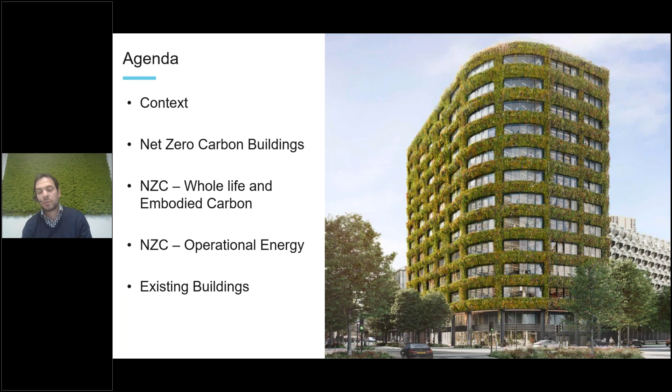So just to give a bit of context, why are we talking about net zero carbon? A couple of years ago in Glasgow, the world came together at COP26 to review our global commitments and targets, and even with the most optimistic scenarios, we're still significantly above the 1.5 degree target we've set ourselves in terms of limiting climate change, with actual policies indicating we're probably closer to 2.7 degrees of change. So although we continuously talk about reductions and meeting the aspirations of the Paris Agreement, we are still a long way away from achieving it.

There are a number of websites and organizations which track individual countries' performance, and as you can see from the globe shown on screen, most countries are either critically insufficient or highly insufficient in terms of their policies. There are very few countries aligned to the Paris Agreement, I think it's 2 at the moment, and there's a number which are almost sufficient but still have a long way to go to meet those targets.

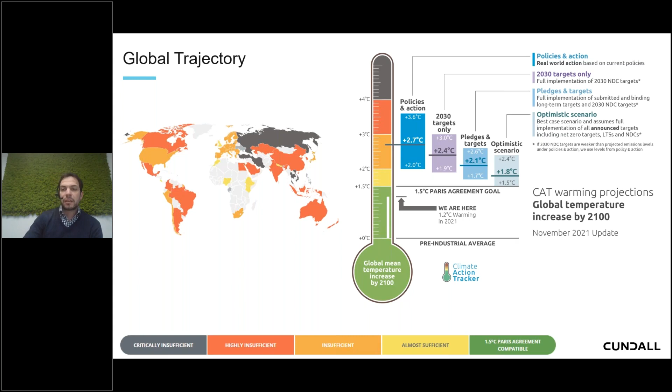When we look at the UK, it's an interesting scenario - we generally are doing better than most in terms of policy and where we actually sit. The UK were one of the first governments in the world to declare a climate emergency and set a net zero carbon target by 2050. We did this back in 2019, and we've since strengthened that because we know that being net zero carbon by 2050 won't be enough.

It's the scale and speed of reduction which is important. We've set interim targets of 78% by 2035 and 68% by 2030, and that's really important if we want to align to the 1.5 degree Paris Agreement. That still leaves the UK insufficient and not aligned to the Paris Agreement, and this is purely based on policies, not action. The policies we've got will potentially enable us to get there, but it's still not fully aligned, and we need the action to follow up the policy.

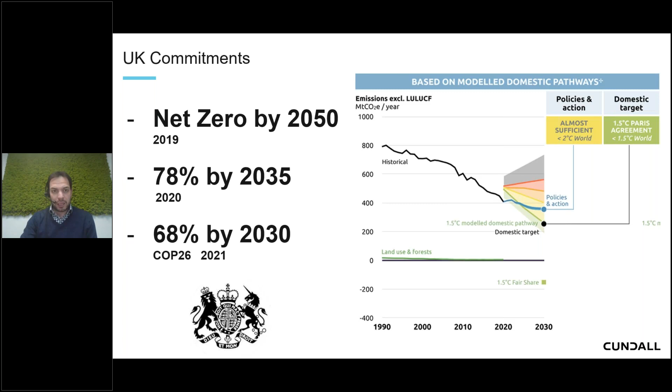What's really important is to look at it by sector. Last year, the Committee for Climate Change issued a document to the government which indicated where they were on track and where they weren't on track in terms of meeting their requirements. In terms of energy, electricity supplies and surface transport, there's credible plans, some risk associated with that, but they generally have a strategy of getting close to where they need to get to, not fully, but close. Whereas the ones we're generally interested in, buildings and construction, there's almost no strategy. There's significant risk and insufficient plans in order to get there. So there's limited action and limited policy in the area of the built environment, which we need to really address.

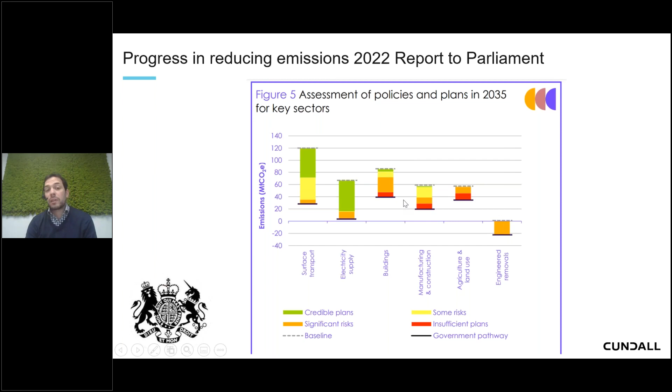So what are we seeing in terms of how that is being addressed at the moment? There's been obviously a significant move over the last couple of years towards net zero carbon. Everyone's kind of talking about it. Most projects will have a net zero carbon agenda. And that's mostly not being driven by government, it's generally being driven by the private market. We're seeing demand from occupiers who are setting their own science-based targets and setting aspirations to be net zero carbon and demanding that of the buildings they're occupying. We're seeing most of the UK developers sign up to the World Green Building Council or the Better Buildings Partnership commitments to net zero carbon and are working through their pathways and trajectories. And that's being passed on to design teams for both new and existing projects.

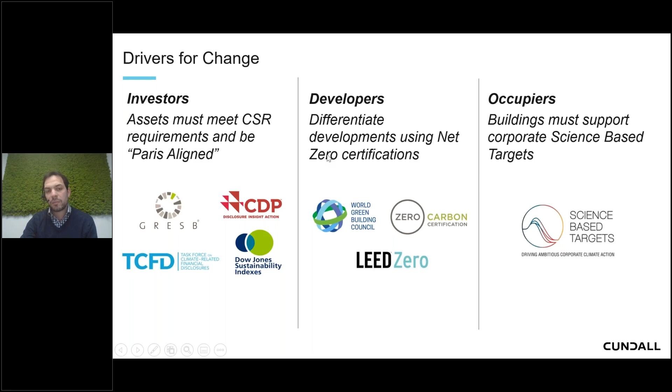But the biggest driver we've seen over the last two years has definitely been from the investment community. Lots of funds and large portfolio asset managers are reporting to TCFD, the Task Force for Climate-Related Disclosure, reporting to GRESB, reporting their climate emissions, and are marketing their funds as green funds, passing those requirements down to developers who are then passing them down to their design teams. So there's a huge drive at the moment from the investment community in terms of compliance with net zero carbon.

One of the ways that they are doing that is via CRREM, which is basically a decarbonisation pathway for existing real estate. What this basically does is it looks at the carbon emissions or energy intensity of any building in the world. So you can select an office building in Berlin, a factory in Mexico, and it will give you an energy target from now to 2050, on a sliding scale aligning to a 1.5 degree trajectory. What large portfolio owners are doing is looking at their individual assets, understanding the current performance. If it's below the green line, that's good, it's performing well. But if this asset, which is below the green line now, doesn't do any works and continues operating at the same level for the next 10 years, then it will cross over that green line and be above its fair share according to the Paris Agreement.

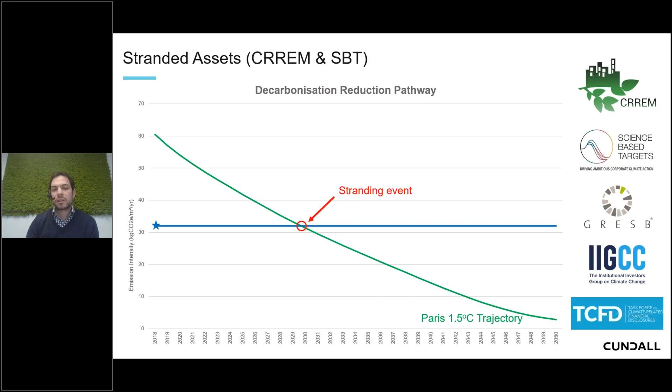That is known as a stranding event, and what lots of pension funds and investors are doing is trying to understand when their assets will strand, and either move those assets on if they're going to strand immediately, or do works to those assets in order to improve them. So there's lots of net zero carbon assets and audits in order to move those assets more aligned to the Paris Agreement 1.5 degree targets. So that is driving a huge element of the built environment in terms of why we're doing net zero carbon.

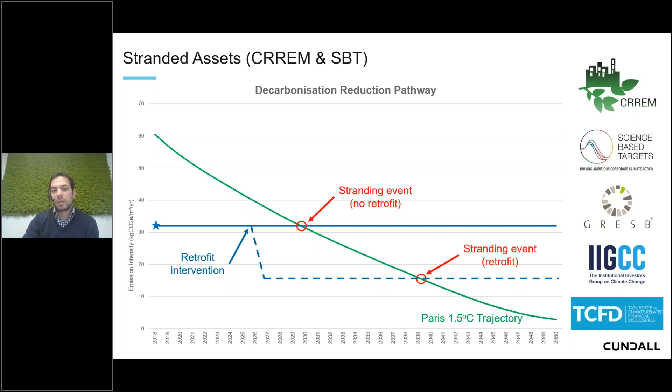In terms of definition, there's been a lot of documentation published over the last few years from UK GBC, LETI, CIBSE, and other organisations, and we're generally getting to a unified definition. The Whole Life Carbon Network last year published a unified definition for net zero carbon, which has been endorsed now by iStructE, CIBSE, RICS, RIBA, and pretty much all of the built environment. So there are unified definitions now, which we're going to be taking forward, and they've been written into the new RICS guidance and will be used for the net zero carbon verification standards. And what's important to understand is really the difference between net zero carbon and carbon neutral.

Carbon neutral has been a term we've banded around for over a decade, probably 2 decades. And that simply is that you work out your carbon emissions and then you have removals which equal your emissions, so you can buy offsets which equal your emissions. There's normally a requirement to have a reduction plan, but there's no minimum standard you must meet in the first place. As long as you remove your emissions, you can claim to be carbon neutral. That's kind of lost a lot of credibility over the last few years with the unreliability of offsets and the idea of paying someone else to do your work, basically.

So where we've kind of moved towards is net zero carbon. Net zero carbon basically means that before you go to removals, you have to hit minimum performance targets which align to a 1.5 degree scenario. So your emissions have to be capped in alignment with 1.5 degrees, and then you can choose to go to net by doing removals. But in theory, just doing the emissions reduction in alignment with 1.5 degrees is enough to align with the Paris Agreement. The removals are a final added extra step.

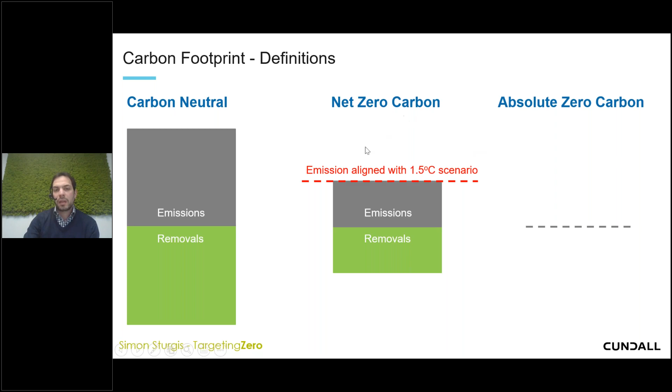When we talk about net zero carbon in the built environment, we're generally breaking that into 2 different elements. We're talking about net zero carbon in operation, so that's generally operational energy, also including refrigerants and off-gassing, which is becoming more and more important as we reduce energy consumption.

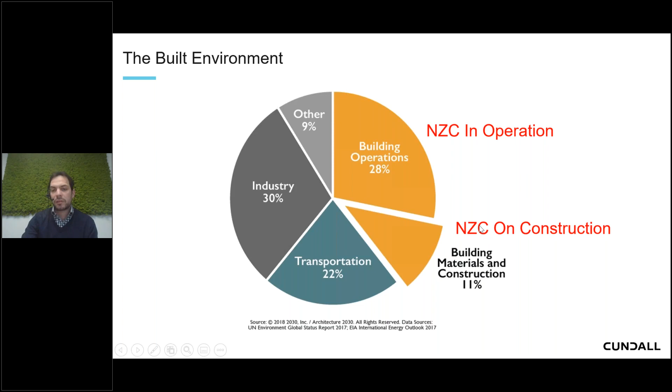There's also net zero carbon on construction, which looks at the embodied carbon in materials. That's been more of a focus of structures, architecture and facades, but the importance of building services can't be underestimated. What we've found over the last few years is building services have generally been underestimated in terms of their amount of embodied carbon, and you have to remember that building services are generally replaced much more regularly than things like facades or structures, which generally have at least a 60-year lifespan, whereas services is generally 20-25 years, so we'll have a much more regular replacement cycle.

Just starting with embodied carbon, over the last 10 years we've seen a much bigger focus on it, starting with the introduction of the life cycle modules from the European Union. The RICS professional standard was published in 2017, which was a major game changer, so the construction industry had a unified way of calculating. That's just being updated at the moment and will be released later this year. Again, LETI have produced a number of guidance documents, including their embodied carbon primer.

CIBSE in 2021 published TM65, which is the first methodology in the world for calculating embodied carbon in building services, and hopefully a number of you have been working towards that and are using that on projects. The next step will be to get embodied carbon into building regulations, like Part L regulates energy efficiency. Part Z is a proposed guide which will make it a mandatory requirement for all developments to do embodied carbon calculations. There's a strong lobbying group trying to get that through Parliament at the moment.

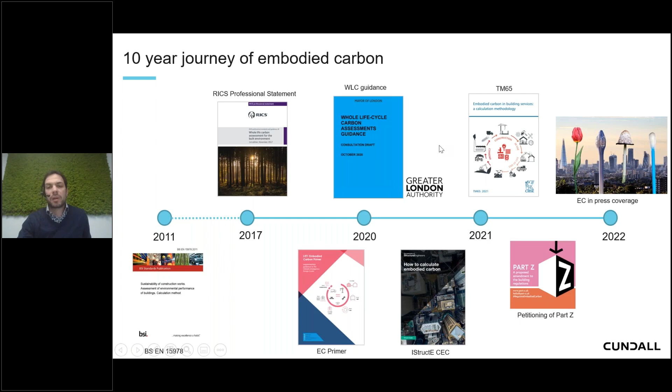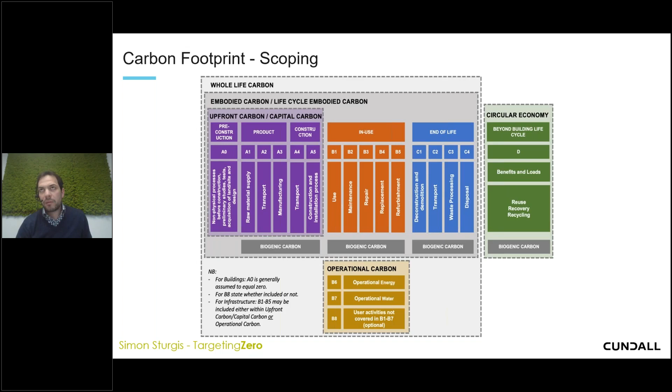So when we look at embodied carbon, we generally use the RICS methodology, which breaks embodied carbon into a number of areas. To simplify this, we generally talk about upfront embodied carbon, which is the carbon that the building requires to be built up to practical completion. And then we talk about whole life carbon, which considers the in-use, repair, maintenance, refurbishment, eventual demolition, and then hopefully reuse of some materials as part of the circular economy.

Whenever doing any assessment, the main focus is setting targets around the upfront embodied carbon, because that can be much more accurately calculated, and the climate emergency is now, so we need to understand what that embodied carbon is and limit that as much as possible, whilst making consideration of why we're doing things based on whole life carbon.

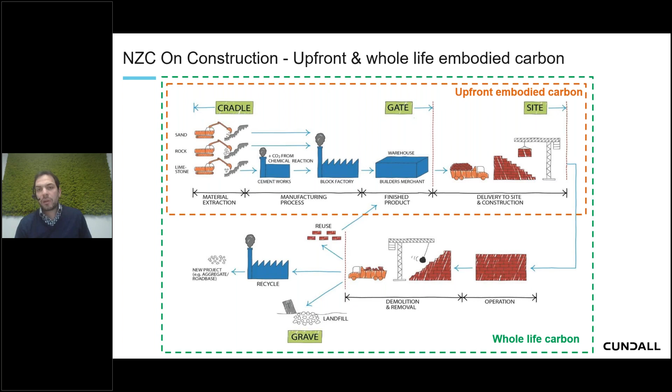A good example is facades. If you're looking at a building, if it has a facade system which is low embodied carbon but has to be replaced after 30 years, it might be more beneficial to go for a slightly more intensive upfront embodied carbon, but it's got a 60-year life. So again, it's making those trade-offs between upfront embodied carbon and whole life embodied carbon.

A number of organisations, especially LETI, have been setting targets around embodied carbon, both upfront and whole life, for a variety of buildings including offices, residential, education, and retail. These are for the whole building, but the documentation breaks them down into sub-targets. So for a commercial office with a target of 600, there should be a target of probably 300 for the structure, 100 for the facade, and 100 for services. It's about understanding the budget for your element of works and then trying to lower that as much as possible.

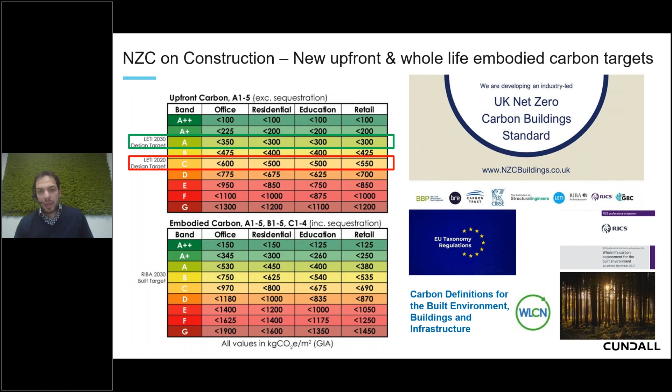In terms of building services, we should be using the new CIBSE TM65 methodology to fairly accurately predict embodied carbon. More manufacturers are publicizing their embodied carbon data. Ideally that would be EPD certified data, but a lot of them are only just starting to go through the process. The problem we generally have in building services is very complex supply chains.

If you think about structures, you've generally got a steel beam which has been mined and fabricated in one factory - a very simple process. Whereas with something like an AHU, you might have 1,000 components coming from all over the world, and depending where those components are manufactured, there will be different carbon emissions. Their transportation to be assembled will have different emissions too. Pulling all of that information together is quite onerous for the supply chain.

Manufacturers are doing that, and if you can specify performance requirements for different equipment, that's really useful. Getting them to upload their data onto CIBSE's website is really valuable, because then we have a much better database that all consultants can use to benchmark projects and use default values.

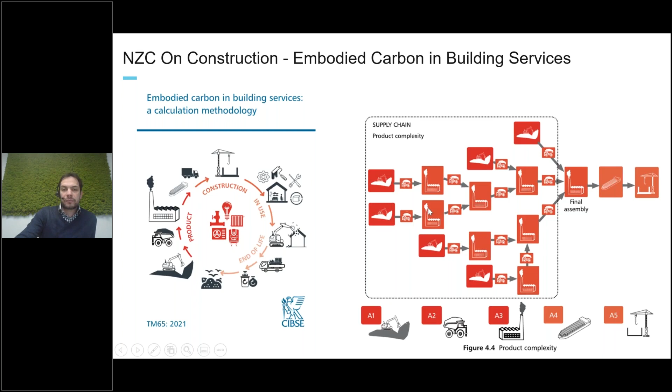We're seeing more and more of a requirement in terms of planning for embodied carbon. Whenever looking at a new project, there will be a requirement as part of the planning application to do embodied carbon assessments, looking at different structural solutions, different facade solutions, hybrid structures with CLT flooring and steel members, full steel structures, or full timber, comparing them against benchmarks like the GLA benchmark as part of the planning application.

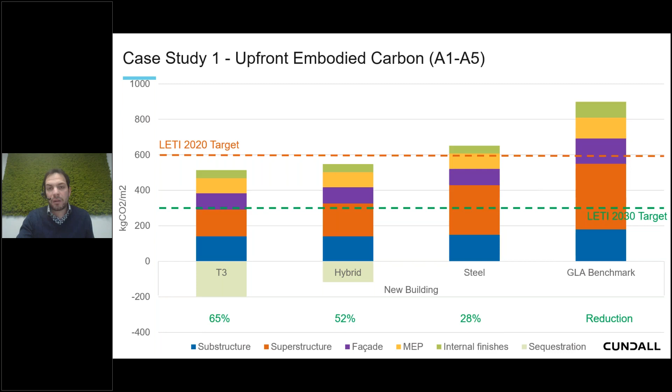What's interesting is we're starting to see a requirement to not only look at the embodied carbon but also bring in the operational carbon - the operation energy. As you can see from this graph, if we take a 60-year life of a building using current grid emissions factors, operation energy is the significant part - at least half the carbon of a new building.

But if we use the national grid decarbonisation strategies, then operation energy becomes less and less important - in some instances it could be less than 5 to 10% of the emissions of a building over its life. So that upfront carbon is really important. What you should be doing is reporting both grid decarbonised numbers and non-decarbonised numbers to show the uncertainty and risk associated with some of those decisions when going through the planning process, so they can understand the implications of either doing nothing like refurbishment or a full new building.

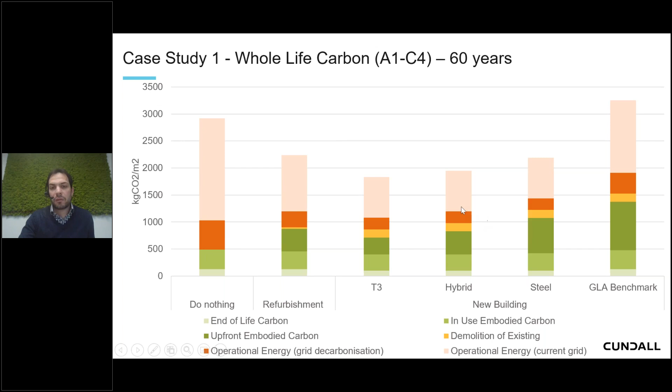One of the things rising in importance is the RetroFirst campaign from the Architects Journal. You've probably seen in the media there's been a bit of backlash against demolition and rebuild. So justifying any works is really important in planning, and we should have a focus on reusing as much as possible, whether that's the entire building or just saving the structure. Structure is generally 50% of the upfront emissions of a new building.

So if we can take a building back to structure and reclad with an energy efficient facade, you're going to be halving the carbon associated with it, whilst being able to get down to the energy performance requirements we need for new buildings.

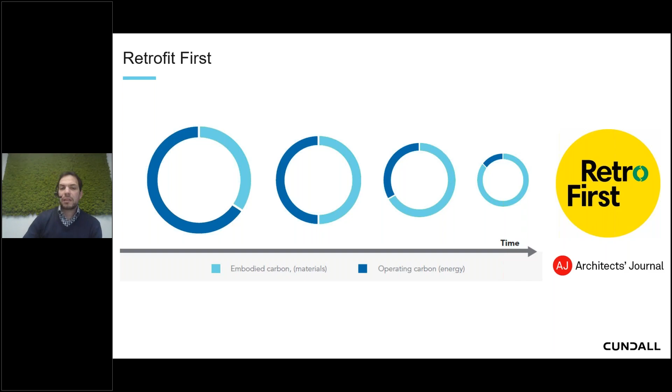Moving on to operational energy - this is generally where we've focused as building services for the last couple of decades. This is the definition generated by the Whole Life Carbon Network for a net zero carbon operational energy asset: where no fossil fuels are used for heating and hot water, where it meets local energy targets, and all energy is generated on or off-site from renewables which demonstrate additionality.

So really what we're looking to do is move away from natural gas heating or fossil fuel heating, electrify, and then reduce that energy consumption in line with targets. Once that's done in use, it's about providing renewables.

So if you're building a 2-story building out in a country park, there's no reason why you probably can't generate enough energy to be self-sufficient. Whereas if you're building a 10-story building in an urban environment, you won't have the roof space available to do that. So a proportion should be generated on site, the rest coming from power purchase and renewable tariffs, depending which country you're in and how that's managed.

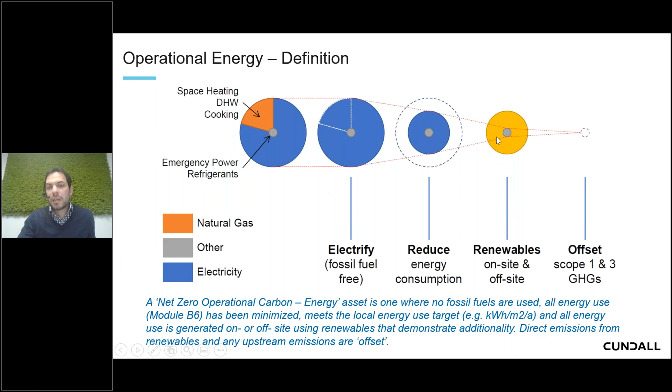We also will always have some residual emissions associated with backup diesel generators, refrigerant leakage, so they need to be reported and understood. And as we decarbonise the grid, refrigerants are likely to become a much more significant element of what we're doing going forward.

One of the biggest challenges will always be, what are the operational energy targets we're setting? The UK Green Building Council did an exercise a few years ago where they looked at how much renewable energy we can generate in the UK, bringing online the proposed schemes, a lot of offshore wind, and then saying how much would we be able to meet of the UK supply. And we wouldn't be able to meet all of the UK supply.

So at the same time as generating more renewable energy, we need to reduce demand on the grid. That needs to come across all sectors. And if all sectors reduce their energy consumption equally, that would probably equate to about a 60% reduction in energy demand in order to be 100% net zero carbon from our energy supplies, which is where the national grid are aiming to go. So that decarb strategy we were talking about earlier is dependent on the ability for the national grid to decarb, which is dependent on energy efficiency and a reduction in demand on the grid.

So if we just take a 60% reduction for all buildings across the board, we can start generating what we call Paris-proof targets for different building sectors. This is what the UK Green Building Council and LETI have done.

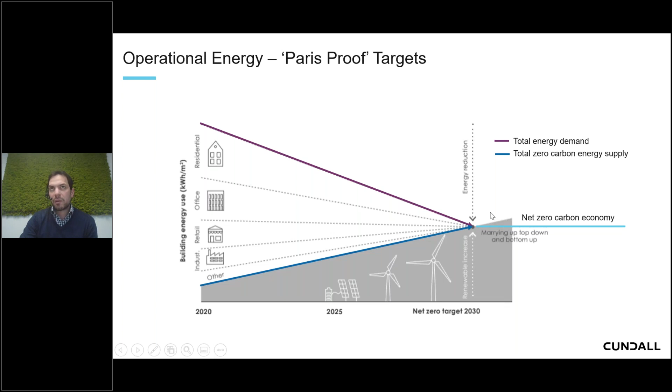If we take commercial offices, you can see here, based on the energy efficient REEB benchmarks, you've got a 50 percentile office here, which has energy consumption about 300 kilowatt hours per meter squared. Top 25 percentile, just under 200, whereas the LETI UK GBC target is down at kind of 70. So it's a significant reduction. It's not about small step changes. It needs to be wholesale change to the way we design and operate buildings.

So we know what the targets are. The question is really, how do we meet those targets and how do we measure those targets? One of the ways we've always assessed energy consumption in the built environment has been EPCs.

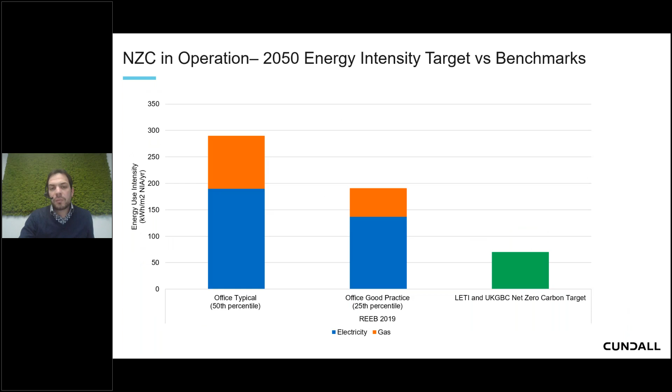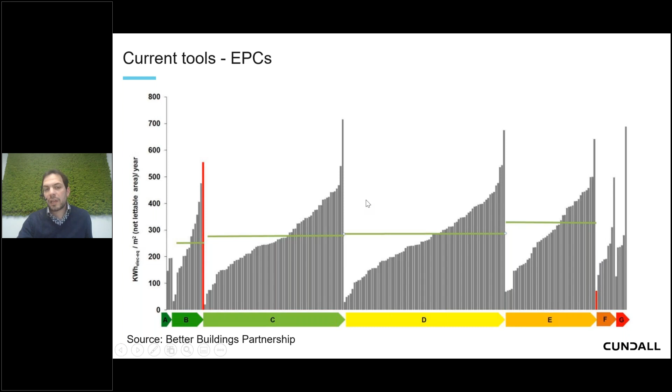We know that EPCs aren't fit for purpose. You can see from this diagram, which has been used extensively over the last couple of years, there's no correlation between the actual energy performance of a building and its EPC rating. This is because EPCs are very simplistic. They're very much focused on energy efficiency. They don't look at energy consumption. They're generally standardized profiles and only look at regulated loads, not a whole building load, looking at process loads and systems as well. So again, EPC is not a measure of operational energy. It's a good guide of energy efficiency, but that is all it should be used for.

What's been brought up to bridge the gap is the UK Green Building Council for offices have put together a step trajectory showing whole building and base building energy consumption targets. So base building would be the landlord systems. The whole building would also include small power and tenant systems being used. This approach is being used across multiple sectors, but the only targets at the moment are for office buildings.

And it has, you can see, a step trajectory showing targets from 2020 to 2025, 2025 to 30, 30 to 35, and then the final Paris-proof targets. This is an interesting approach.

So a lot of new buildings are looking at these step trajectories. And if you see on social media, on LinkedIn and other places, news articles, that buildings are claiming to be net zero carbon, with almost certainty they'll be looking at the interim targets. They won't be looking at the Paris-proof targets. There are very few, if any, that are actually meeting the Paris Proof targets.

So they have a time stamp which basically says they're net zero carbon for a period, but once they go past that period, they will no longer be aligned with the net zero carbon aspirations and will need to do remedial works. So what you really should be doing with any project is pushing as far along those steps as possible in order to align with the Paris Agreement and not have to do extensive works in the future.

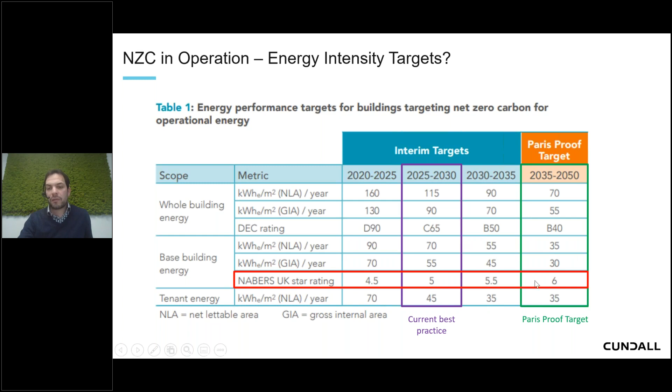In the commercial office sector, there's also been the introduction of NABERS UK, a rating system which only looks at the base building, so only landlord systems. It gives a star rating from 1 to 6, with 6 star roughly equating to net zero carbon. At the moment, the best new buildings in the UK are coming in at 5.5 stars, hitting that interim step, but none have got to that 6 star level yet.

When we talk about operational energy, we're talking about actual energy consumption - metered energy consumption. We should be taking the metered gas and electricity readings, and comparing the energy consumption per square meter of a building. That will tell you whether the building is net zero carbon in operation.

Obviously, when we're doing new building or retrofit work, we don't have that data - we're doing design work. Therefore, we need to predict and make estimates of operational energy, using simulation methodologies. For commercial offices, we recommend things like NABERS Design for Performance. For heat-led buildings like residential, leisure centres, hotels, Passivhaus is proven technology for achieving performance in use. Also CIBSE TM54, updated last year, is a great methodology for assessing simple and complex buildings - it can use a simple Excel spreadsheet-based approach, or a full HVAC approach using IES or TAS systems. So it's a very good tool for operational energy prediction.

But remember, they're only predictions. The final rating or performance is verified in use with 12 months of real data. What it's not, and what we don't want people doing, is talking about Part L and EPCs. They have their place and are useful, but they will not give an indication of how a building is actually performing or likely to perform in terms of its actual operational energy.

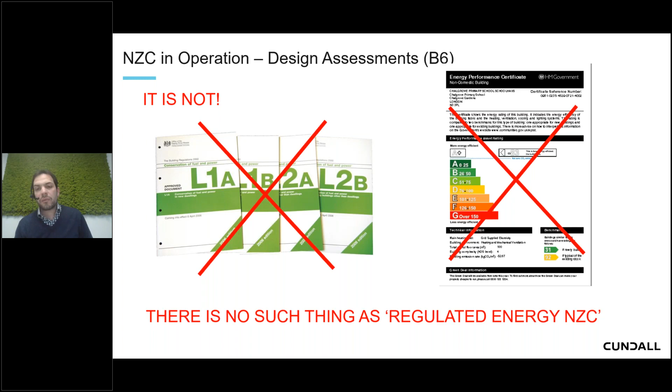Coming back to those CRREM trajectories we were talking about earlier and interim steps - if you build a building and on day one you're net zero carbon, aligning with CRREM, you're still going to have a stranding point. What you should be doing with any new development is trying to push that stranding point out as far as possible. So if a client says I want a net zero carbon building, you need to explain that if they hit an interim target, it will be net zero carbon, but it will have a timestamp - it will be net zero carbon till 2030 or 2035, after which they'd need to do works to maintain that status.

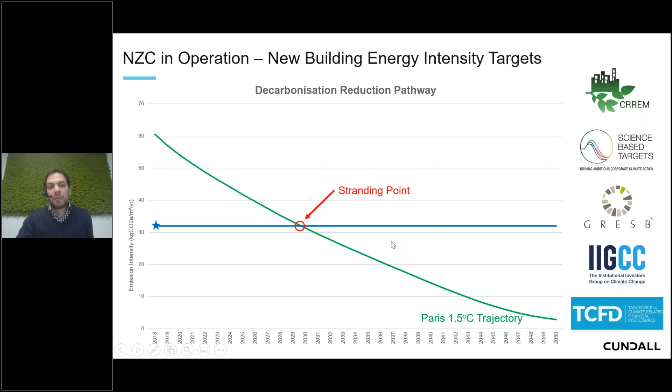And when technical due diligence is done on that building by the professional team, they will highlight that stranding risk, and that will affect the valuation of the building going forward.

One of the things we generally see around net zero carbon is a lot of articles on the cost of going to net zero carbon. Obviously there is generally an element of cost associated with it, but most of that can be limited - it's about understanding what the true cost is. We've heard figures from a couple of percent up to around 20%. If it's well designed, there's no reason why that can't be closer to a 5% uplift.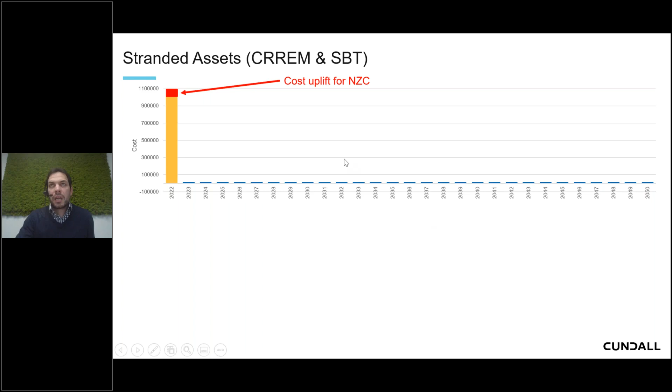You're generally going for thicker or more insulation, more controls, more zonability, which all add marginal cost to a project. But what you have to remember is if you spend that cost on day one, it's probably a 5% uplift. If you don't spend that cost and the building achieves worse energy performance, it will strand earlier, and there will be a requirement to do retrofit works. Going back to a building built 10 or 20 years ago and having to improve the insulation and cladding, or changing out boilers for heat pumps, is obviously going to be much more expensive as a retrofit option than a new build option.

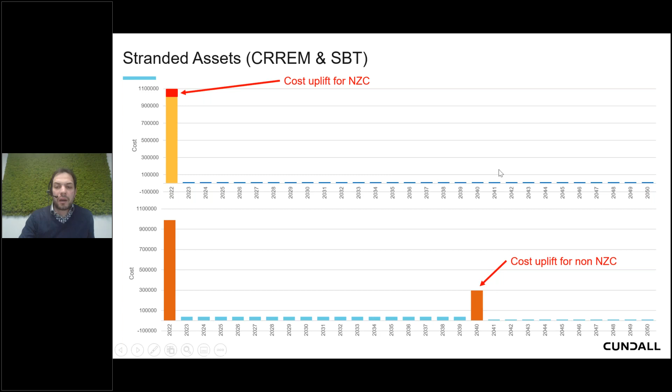So as well as doing whole life carbon assessments, we should be doing whole life costing exercises to demonstrate the value of doing these works on day one, rather than paying considerably more over the life of the building to do piecemeal retrofit.

So just looking at a case study: this is Eden, a project in Manchester which is due for completion in the next few months. It was designed to BREEAM Outstanding, but was also one of the pioneering projects for NABERS UK. It has done a design for performance assessment, indicating it's getting to a 5.5 star NABERS rating, which is the highest rating in the UK.

There's a couple of buildings at 5.5 star, none at 6. The key thing to remember with NABERS is there are two schemes: NABERS Energy and NABERS Design for Performance. Energy is the important one - that's looking at the real energy data.

So you need 12 months worth of bills, your hours of operation, and your leased areas. Once you've got that, you can input that into the NABERS calculators, which will give you a NABERS energy rating. This is going to be really important over the next few years in order to compare buildings, leased buildings, and the valuation of those buildings.

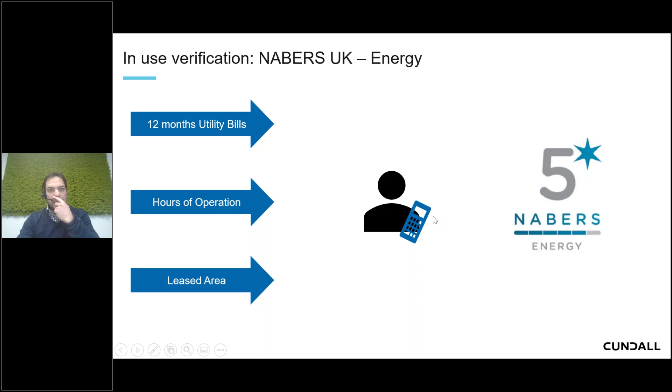In the absence of that, for a new building, what we do is NABERS Design for Performance. NABERS Design for Performance and NABERS Energy look at the base building - generally the whole building HVAC systems, lifts, common area lighting and power, and domestic hot water. What it excludes is occupier lighting and small power loadings.

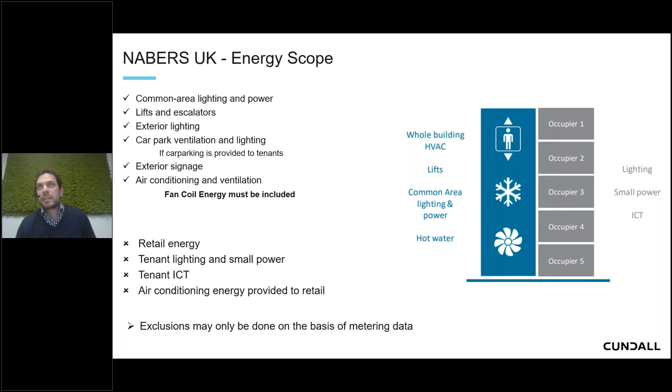They should be added to the total for the whole building analysis, but for NABERS we really just care about that base building performance. What it means is that as a design team, we can focus on the base building because that's what we have control over, and then we can leave the occupier with their fair share in order to look at their ICT and operating parameters as they go forward.

Design for Performance has a very defined process - basically signing up to an agreement, doing detailed modeling with off-axis scenarios. An off-axis scenario would be modeling different variations, using future climate weather for example, looking at different occupancy patterns and profiles, saying what if, running different scenarios to see what impact that would have.

The reason you do that isn't to get a range of results, it's to see what impact it would have on your energy performance, so you can understand the risk of those scenarios and take mitigation measures to reduce that. What's important with NABERS is that once you've done the modelling, it needs to go through an IDR process - independent design review - where a panel of experts will review the project, make recommendations on the design, simulation, controls, commissioning, and operation of the building in order to maintain that rating and verify whether they think you can actually achieve the rating you've targeted.

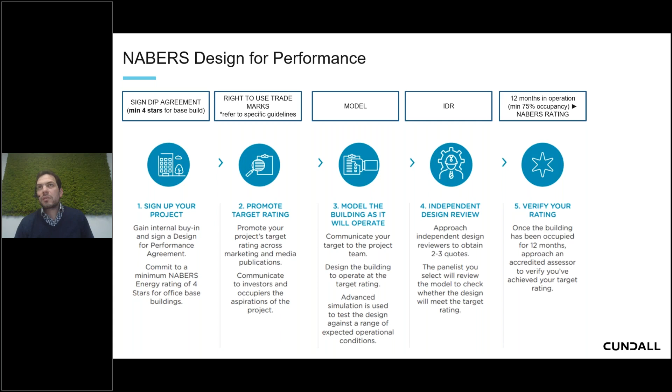Once you've got that, you can market the building as NABERS Design for Performance rated, and then there is a commitment to change that to a NABERS Energy rating once you have the 12 months worth of data.

What's really important to understand with the IDR and modelling is the modelling is based on a set of assumptions and scenarios - it's not a prediction of the future. If you're predicting the energy consumption for the base building is 40 or 45 kilowatt hours per metre squared, that's based on the assumptions. What the IDR process will do is highlight where things can go wrong.

Like if you have a mixed mode ventilation strategy, for example, and you haven't looked at how you're going to control the windows, that's a significant risk of increasing the amount of energy consumption you're going to have. Also looking at how you manage out of hours usage - if you have no way of controlling the hours that occupiers are using the building, that will significantly push the energy up.

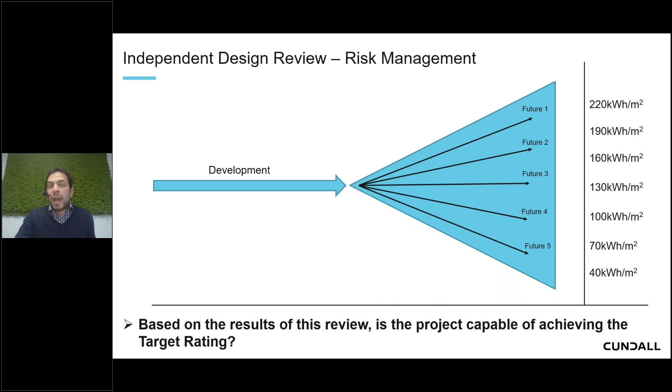So it's highlighting where you need to focus attention going forward, highlighting the risks of various commissioning and controls elements. The IDR will basically say whether the modelling is fine for that scenario, but it's not saying that will be the performance of the building. It's saying the building can perform if it's operated in a certain way, and the future will vary massively depending on how that's controlled, and that will ultimately give the NABERS energy rating, which is the important one.

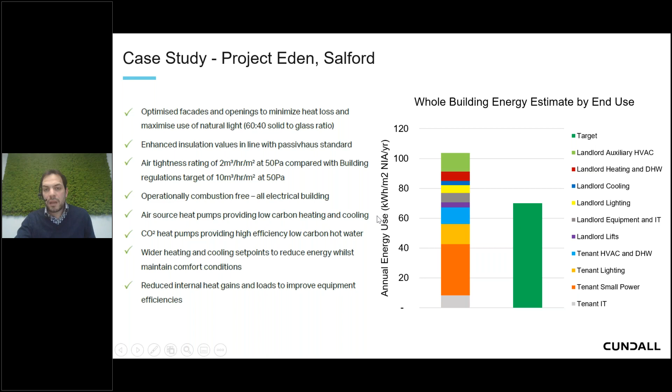So as I said, Eden had done a detailed operational energy assessment at early stages. It's an all-electric building, near passive house energy performance, heat pumps, CO2 heat pumps for the domestic hot water, reduced set points, very efficient design, and that was coming in at 5.5 star NABERS.

But what you can see here is that the net zero carbon target for the UK GBC has 35 as a target for the base building and 35 for the occupier. Eden is coming in just over that 35, just below 40, with a range of scenarios, but we have almost no confidence the occupier can get down to that 35.

So although the base building is 5.5 star, close to 6 star, the actual whole building is significantly above the UK GBC LETI target still.

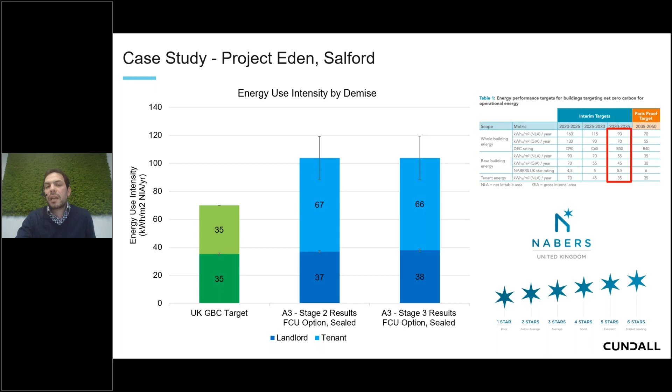This is really important to understand. There are a lot of occupiers out there looking to rent 5.5 star or 5-star buildings, thinking that is enough to meet their net zero carbon aspirations. But you have to remember that energy is broken into two areas. We've got the base building, which design teams are looking to reduce using the NABERS rating, but it also depends on how much energy is used by the occupier.

If an occupier goes in there and works as they have been for the last decade, they will significantly blow their occupier budget. So where you're looking at speculative office type buildings, you should be working with the base build team to get that as low as possible, but also working with the fit out team and the actual organization to look at their operations and performance. Where you've got owner occupiers, you're going to be looking at those combined, but it's always worth breaking them into two so you can have a look at the performance.

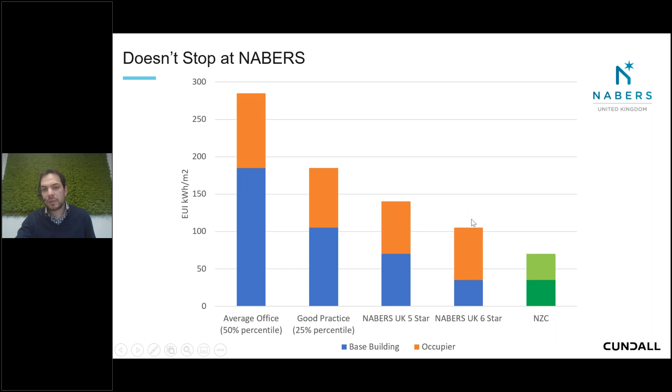Just moving on finally to existing buildings. As I indicated, 80 to 90% of buildings in 2050 are already built. We have to decarbonise all of them to meet our net zero carbon aspirations. That's 28 million private homes and 1.7 million non-domestic buildings in the UK that need to go through a retrofit programme within the next 25 years. That's a huge amount of work, which the built environment and our industry can't currently comprehend or deliver. So we need to upscale in order to meet the challenge we're being faced with.

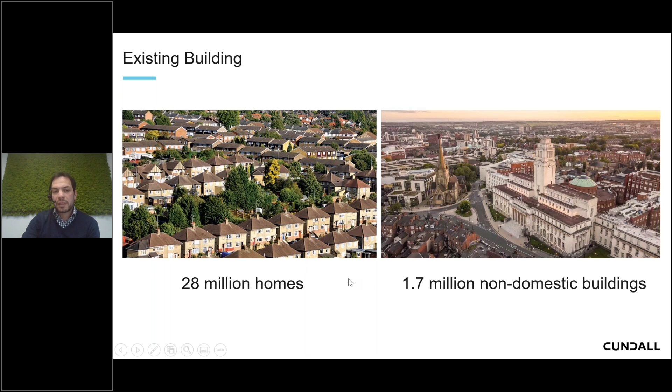One of the biggest challenges we obviously face in the UK is the decarbonisation of heat. Most private homes use natural gas, so we need to move off that natural gas onto alternative sources. The main focus from the Committee on Climate Change is obviously air source heat pumps at the moment, or potentially ground source heat pumps, but the main focus is definitely electrification away from natural gas, which is going to be a huge and significant challenge, both for the built environment and for the energy sector.

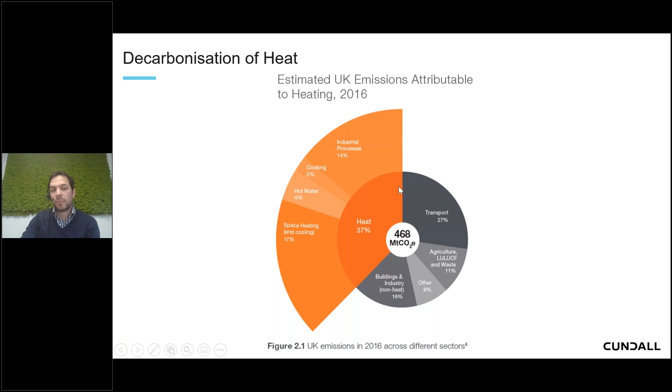So what we're seeing a lot of at the moment is large landlords, developers, and funds looking to decarbonise large portfolios. A number of portfolios could be a few hundred assets. There are clients who have thousands of assets in the UK, and there are super clients who have millions of assets globally, and they're looking to decarbonise all of them.

So they need to go into each asset and produce a net zero carbon improvement plan, looking at what we call the steps to net zero carbon. So looking at passive design, operational energy, removing fossil fuels, renewable energy, but also considering upfront embodied carbon, whole life performance, and then having a reporting structure.

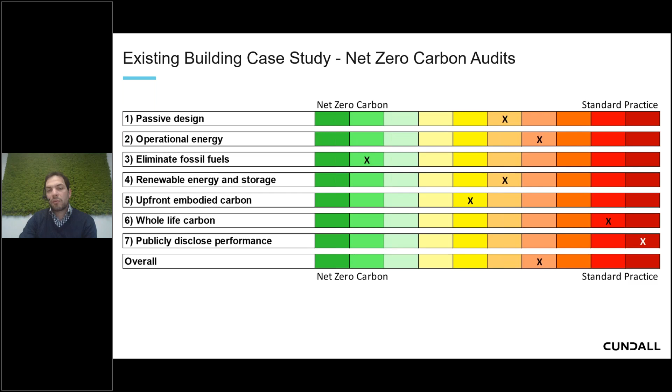What we need to do is understand the current performance of an asset and understand what the target is. And once we understand the target, then we can start going in and looking at individual interventions in order to move the existing asset from where it currently sits down to that net zero carbon target. And that will be through heat pumps, electrification, fabric improvements, potential to move to mixed mode and natural ventilation.

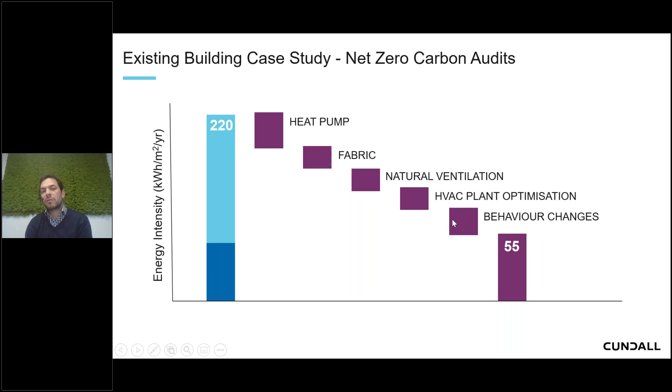But there's also a significant requirement for things like behaviour change. And the problem with existing buildings is you generally don't get the opportunity to go in and do all of those simultaneously. They normally have tenants, plant replacement schedules, and that needs to all be factored into the life of the building. So if you have a sitting tenant who's got a 20-year lease, you're going to struggle to get that building to be net zero carbon by 2030 if that's your target, or even 2040. So it really needs to be programmed into the life operations of that building.

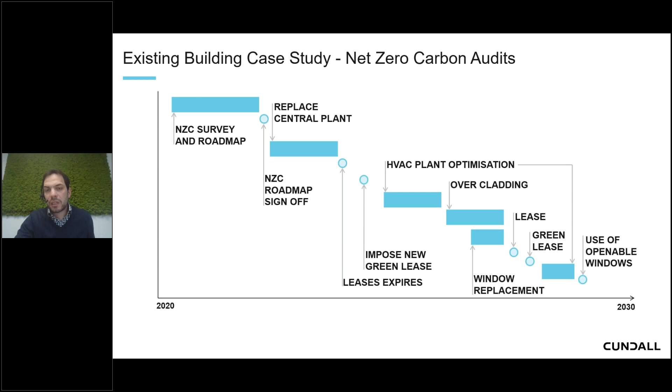As I said, it's been updated, and one of the main areas which has been updated is B6 and B7, which is operational energy and operational water. So there's much clearer guidance now on how to calculate and report operational energy and operational water.

But the biggest thing which is going to hit the industry, hopefully later this year, potentially next year, will be the net zero carbon verification standard. This is a cross-industry collaboration with CIBSE, the Carbon Trust, IStructE, RICS, RIBA, LETI, and the UK GBC Better Buildings Partnership. At the moment, they are looking at the processes to verify both embodied carbon and operational energy.

And one of the key areas they're looking at is sectors. So as I said earlier, we already have a few targets for commercial offices, schools, residential, and retail.

What the net zero carbon verification standard is doing is looking at a multitude of sectors and subsectors. I'm personally involved in the life science group, and we have targets for about 8 or 9 different subsectors of life science. Light industrial, similarly, will have multiple targets and sub-targets depending on the usage and area of the building. So we're going to get a whole range of targets.

There's still a lot up for debate. The question is whether there's step trajectories or just an end Paris-proof target. There's also debate around whether there's base build targets and whole building targets. All of this is being debated at the moment within the net zero carbon standard, and will hopefully be resolved by the end of the year with a clear methodology and process for verifying that.